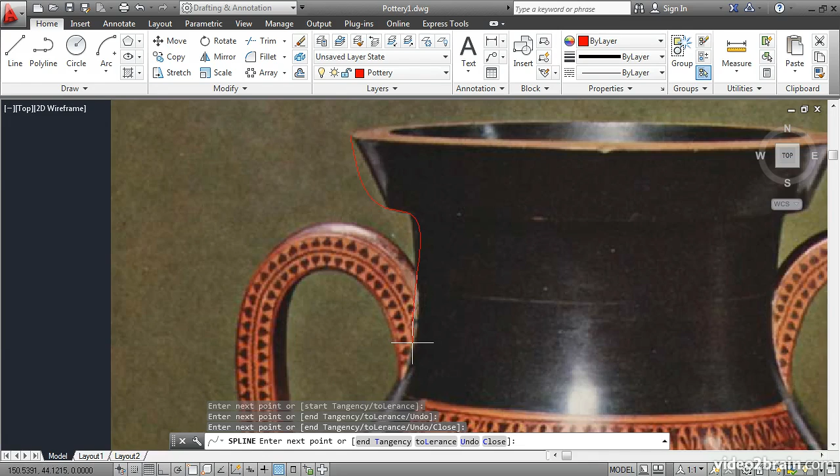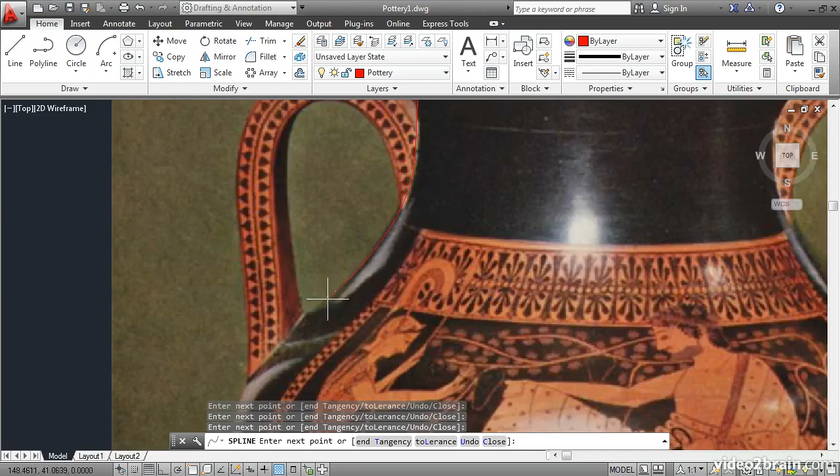Let's not worry about trying to represent the handles. Instead, we'll focus on the curve of the vase. Images disappear temporarily while you're panning. I'll pan up by dragging the mouse wheel and click some more points here, right on the edge of the vase.

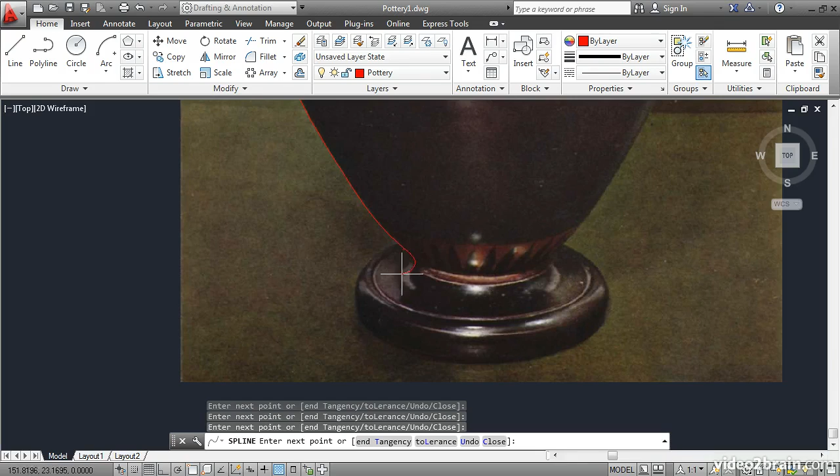I'll pan up by dragging the wheel, and we'll just come down here, click a few more points. Now, because this is a photograph that is underlaid in AutoCAD, we don't have a true representation of the elevation of this object. Instead, we have to kind of guess at how this base would look in perspective.

I'll click about here, have it go down, and then I'll have it go over to some imaginary point here in the middle, about here. Then I'll press Enter to end the spline command.

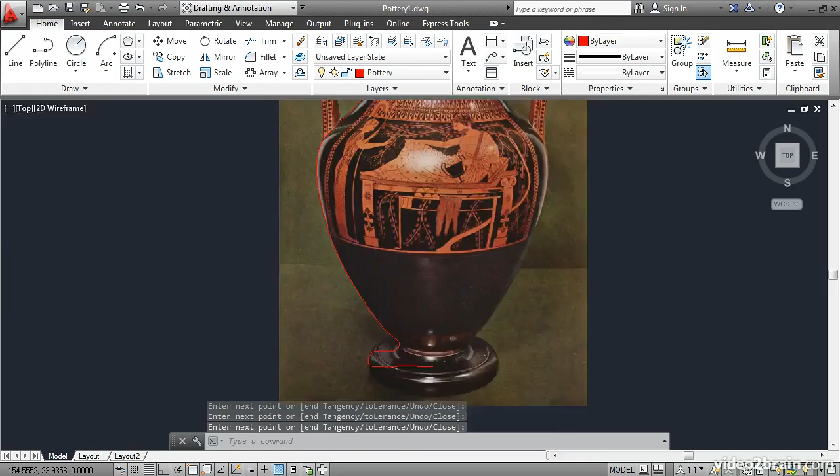I'll double-click the wheel to zoom extents, and let's try the Spline CV method on the right edge of the vase. Expand the Draw panel and click the Spline CV tool. Then zoom into the top, right edge, click the first point about here, and just work your way down.

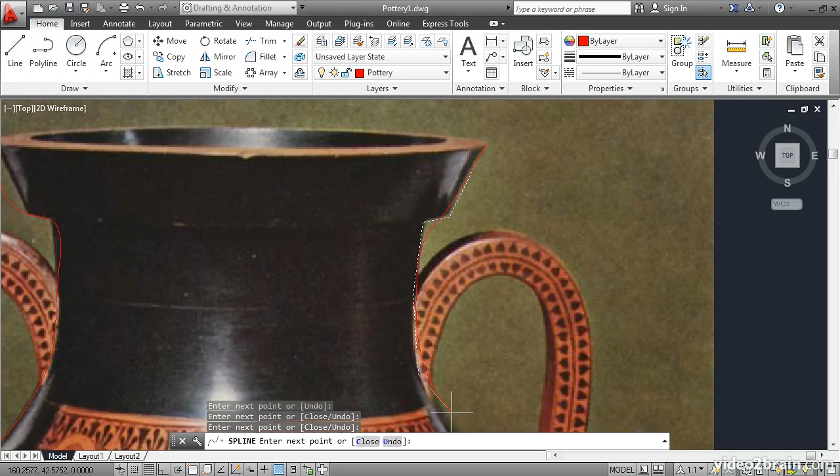Now this is a little bit different. You'll see a dashed white line appear. This is the spline lattice that you're drawing. The red line doesn't actually follow the curvature of the vase. Instead, it's the lattice that does. It's a series of control points that you're clicking, which are on the edge of the vase.

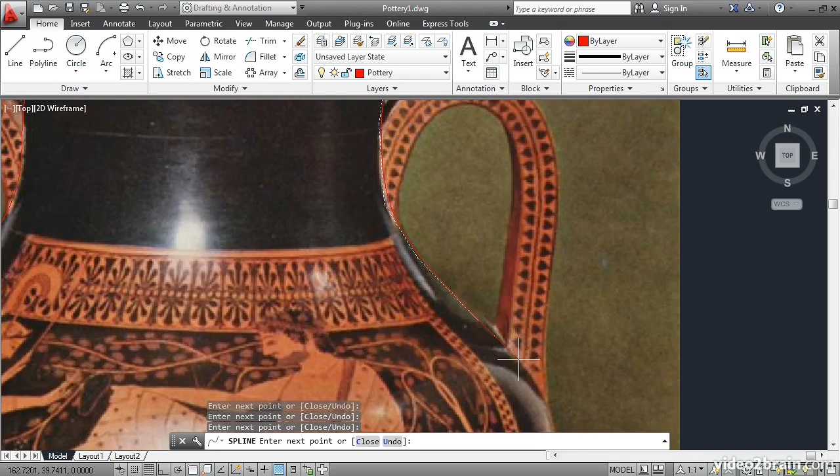So because of this, the CV method isn't the best one when you're tracing edges like this in a photo. See, the red line is inboard of the actual edge of the vase.

I'll come down here and just complete what I started. About there, and press Enter. Now I'll double-click the mouse again to zoom extents.

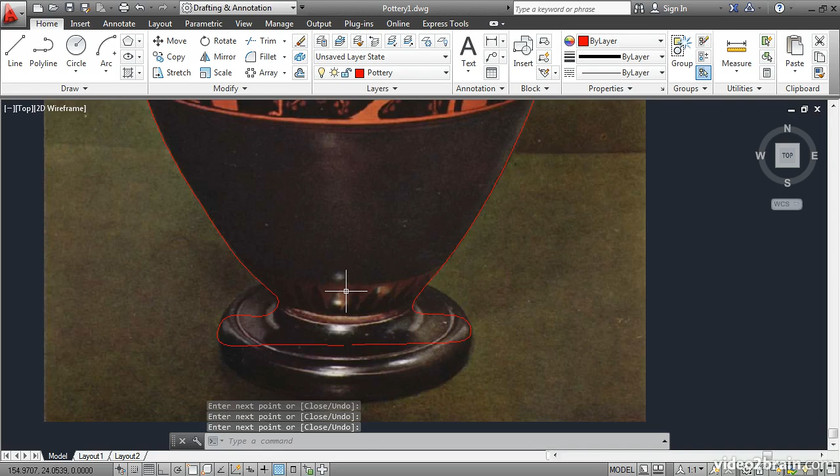Now of these two, I think I like the left spline better because it more closely matches the shape of the vase.

Now I'll select it, and you can see the grips appear. These are the fit points, the actual points that I clicked earlier.

If you double-click the spline itself, you automatically launch the Spline Edit command. And here you can use some of the options to change the shape of the spline. In particular, I'd like to introduce a kink into the fit data. So I'll use the fit data option, and then I'll click the kink option.

As I move the cursor, you can see an X appear on the spline. I'd like a kink to appear right about here. I'll click, and the kink exists. It's hard to see that at this point, but just one click is all it takes to introduce a kink.

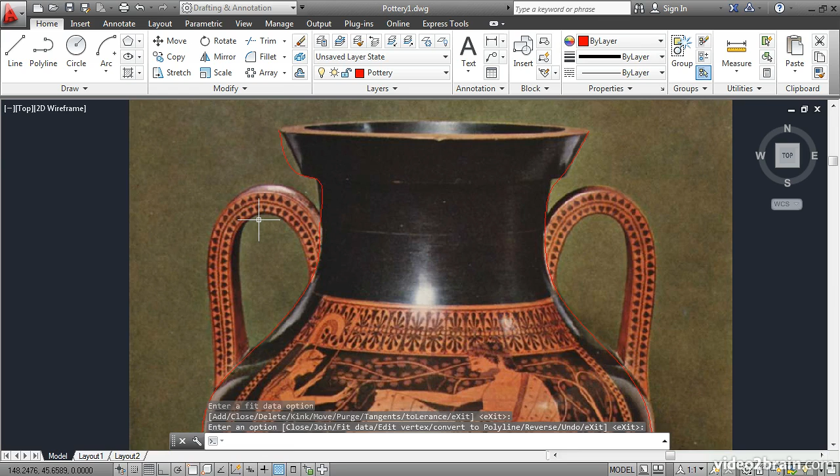Then I'll press Enter for exit, Enter again for exit, and enter a third time to exit the Spline Edit command. Then I'll come up here and select the object again, and I'll zoom in.

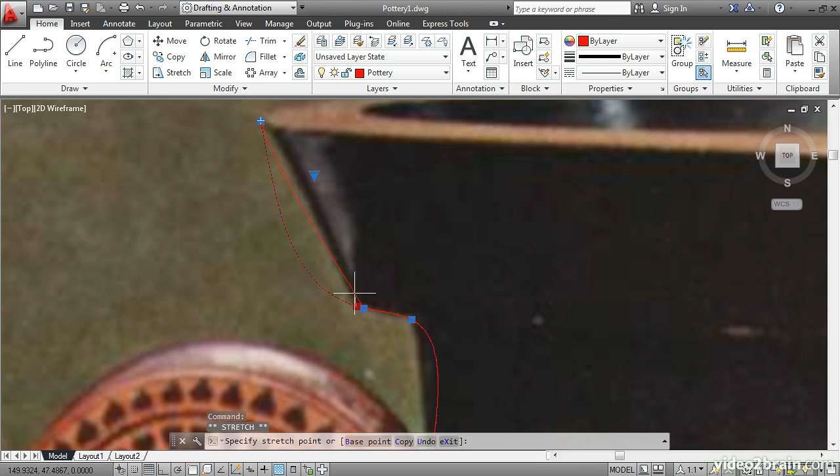You can see an additional fit point exists right here. That's the kink. I'll stretch this point by clicking on it and moving it. And now we have a curvature discontinuity here, and that's also known as a kink. This allowed me to have this sharp edge.

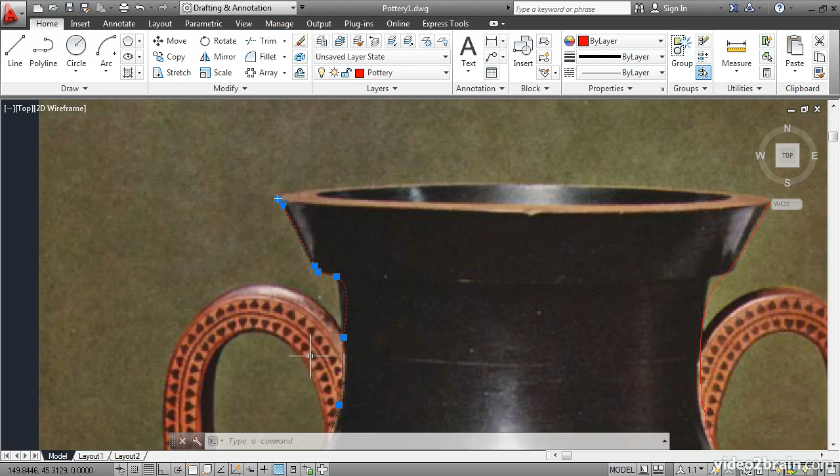Now, I could more closely match these fit points to the shape of the vase just by moving each fit point one at a time.

But there's a more efficient way to do this, and that is to use this multifunctional grip to change the spline from a fit spline to a CV spline. When you do this, it doesn't change the shape of the existing spline. It merely changes where the grips are located.

Now we have a CV spline. It works the same as this other one over here. But we shaped it initially using fit point method.

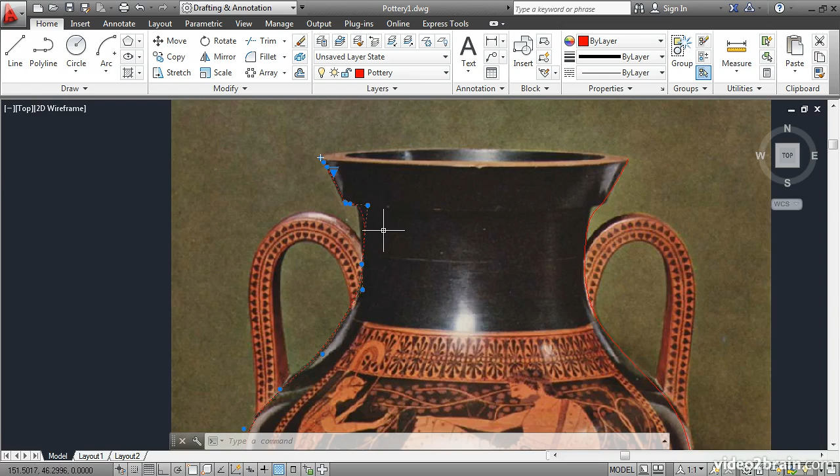Now I can come in here and move these CVs around, and it gives me additional finer control over the placement of the curve.

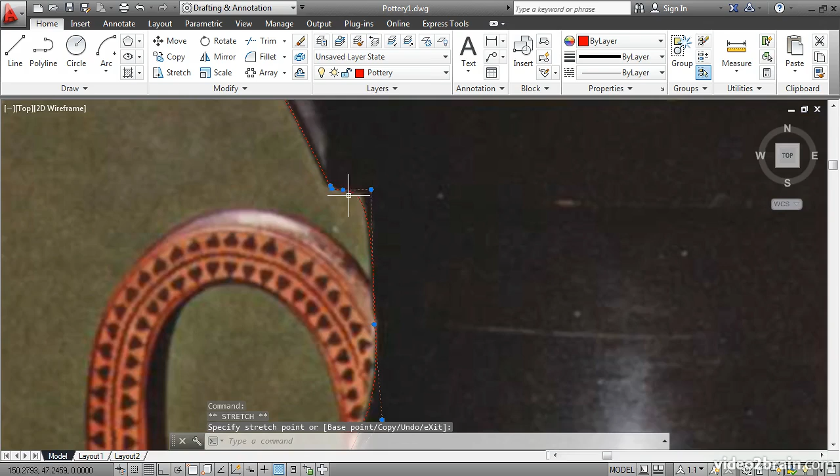I can move these around, and by positioning them just so, I can try to match the curvature to the vase. Now here I can't quite get it right. It's not really wanting to curve as much as I'd like it to.

And so what I'll do is double-click on the spline to launch the Spline Edit command. And this time, I'll use the Edit Vertex option. And then I'll use the Weight option.

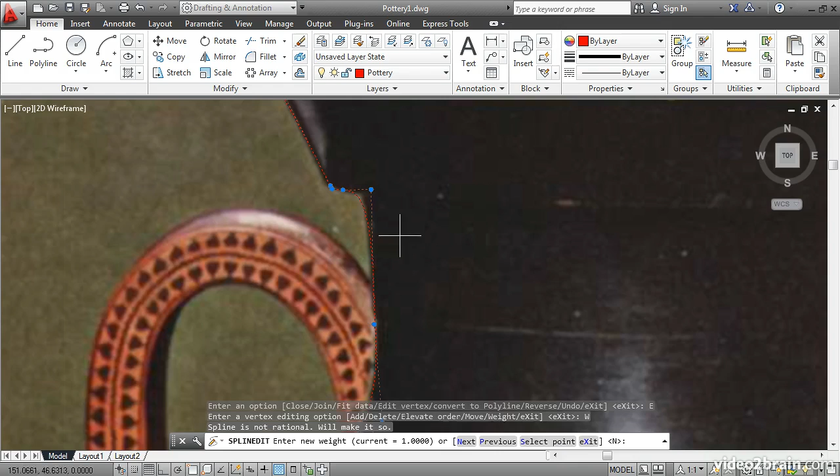To change the weight of a particular CV, you have to first select the CV, and you do this sequentially. The default option here says N, which means next. So I'll just press Enter, and this CV is highlighted. Press Enter again, the next one is highlighted. Keep pressing Enter until you get to the CV that you're interested in, namely this one.

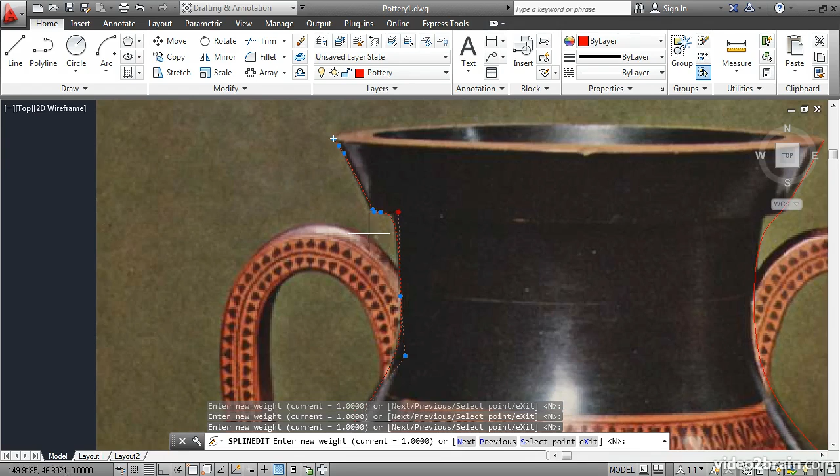Zoom in, and then you can enter a new weight value. All the CVs start with a weight of 1 by default. Let's try a weight of 2. I'll just type in 2, Enter. And you can see that the spline is pulled closer to the CV.

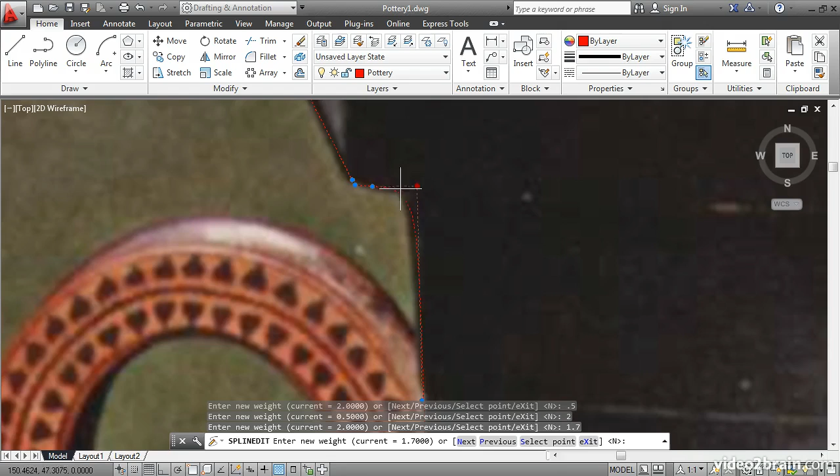If I enter a weight of 0.5, the spline is pushed further away from the CV. So in this case, it looks like a value of maybe 2 or maybe 1.7 would be better, a little bit closer to the curvature here in the photograph. So in this way, you can really dial in your spline object to match just about any curved surface.

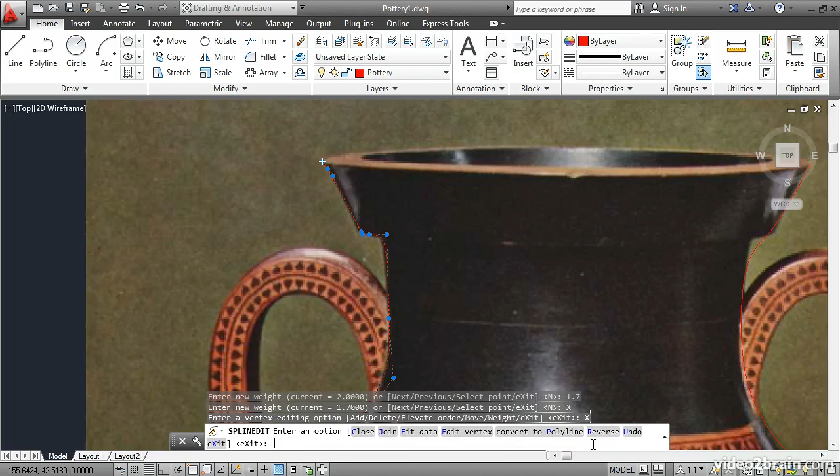Now to get out of this command, we have to use the Exit option, which is not the default. And then again, Exit, and exit a third time to get back to the command line.

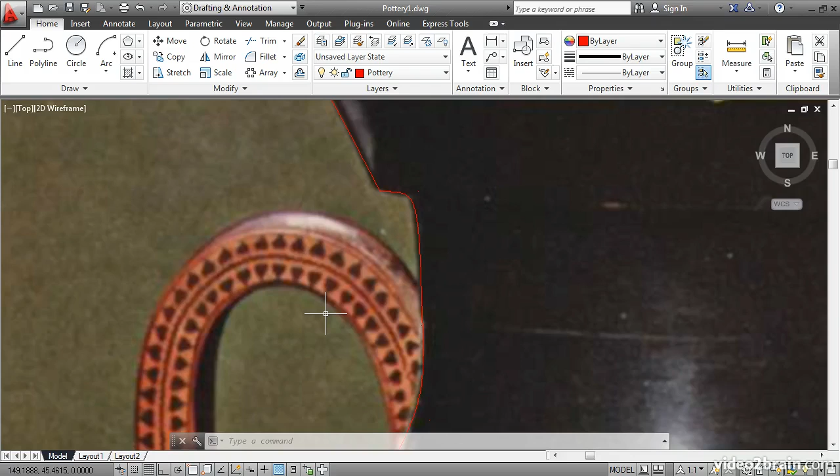In this lesson, you have learned how to create both fit point and CV splines, and have understood their differences and particular advantages. In addition, you used the Spline Edit command to create a kink at a chosen point and added weight to a particular CV.